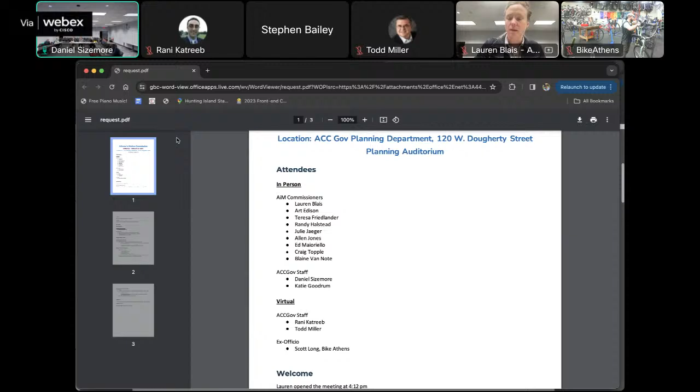We welcomed Katie as our new Vision Zero coordinator, talked about the Mayports 50 survey, heard a presentation from Randy about sidewalk gaps, budget. We'll also talk about the budget this time. Heard the local roadway safety plan presentation. Any additions, edits, corrections to our minutes?

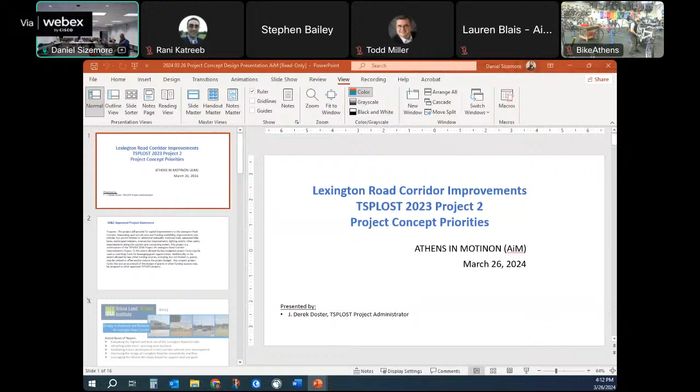Again, this is our T-SPLOST 2023 project number 2, and these are our project concept priorities, working with our user group, just like y'all are an AIM commission put forth together by mayor and commission. From a staff standpoint, we recognize and utilize user groups. A lot of times we'll have members from other groups, but we'll also have staff involved as well. We've been working with our user group back from 2018 all the way through this program that the manager's office has assembled. There's been a lot of history on it and a lot of projects. So let Daniel get settled.

So it's not presenting properly, so you don't have any animations, right? No. Cool, not that fancy. We'll just have this screen up instead of the full-on presentation.

Okay, so again, just the project, there's a sister project, or I call it a sister project. It is project number 2. Number 3, I will talk very slightly about that because it does tie in. But this is, again, the T-SPLOST 2023 project.

And this is the initial project statement of every project that comes through this program. The mayor and commission approve a project statement. Typically it's very broad. It may expand or contract some of the information that was submitted as a project, depending on what the needs are, what staff feels like it may need.

A lot of words, and this is on the Splost website, and it's basically similar to what Lauren said. It's not just for bike ped. It can be used for trails, landscapes, intersection improvements, just a whole collaborative thing through that corridor.

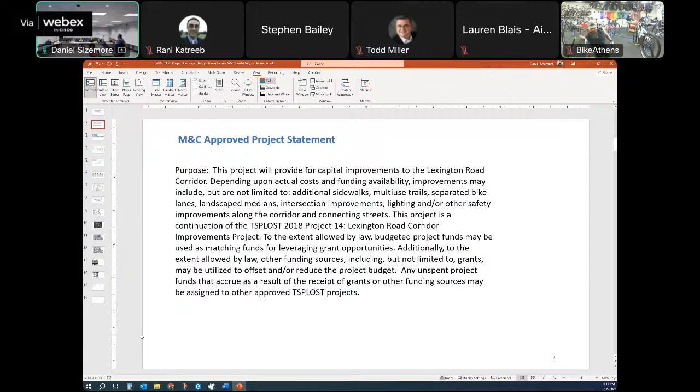I placed a couple slides in here that goes back to some of the information, even before the Splost 2018 program. The Urban Land Institute from Atlanta came in and did a very large work session presentation and public engagement opportunities for the Lexington Road corridor and Atlanta Highway. I just threw this up here as far as what is pertinent to today, but you can see the report for that goal, or the goals for that report.

It's more than just infrastructure. It's how do we improve a lot of stuff. But at the end of the day, that second to the last bullet point really, to me, is kind of how it ties into everything: how do we make the Lexington Road flow for everybody?

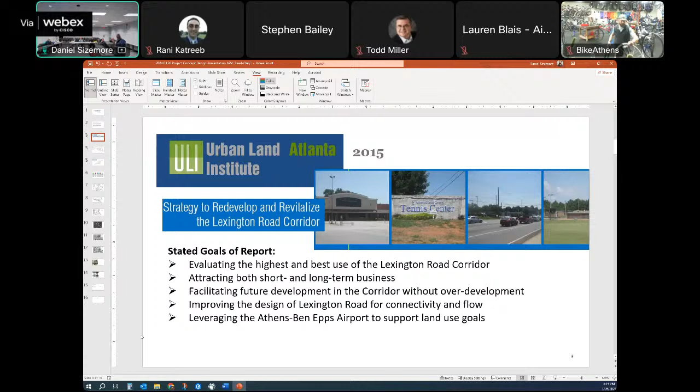And over time, it takes money. And again, some of these projects will help just kind of start nipping off some of it.

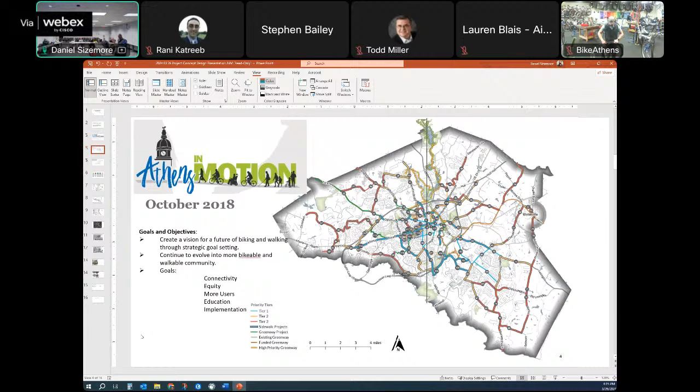So earlier was 2015, that was 2018. And then in August of 2019, Mayor and Commission appropriated funds for the Connect Athens Corridor plan. That was really concentrated on Lexington Road and Atlanta Highway, kind of like the Urban Land Institute - it drilled down to a little bit more of how do we do this. So there's a lot of research that's been going on over the years. Sometimes we research things to death, but there's a lot of history there. Just wanted to let you know that the user group has utilized a lot of that information to help get to where we are today.

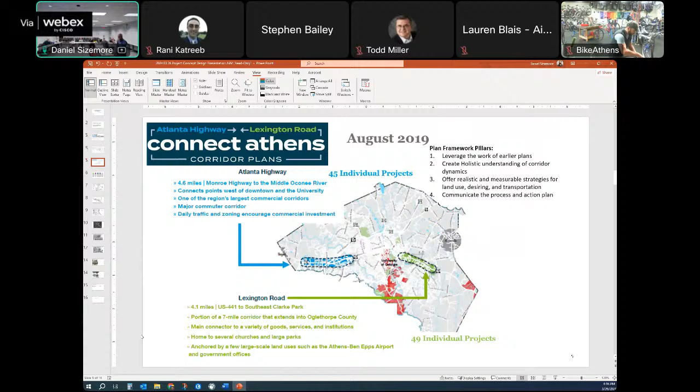I pulled these out of y'all's report, because I think everybody has different opinions of how things link up and move, but I think it's key that a lot of this matches up. The projects that we're going to show you, the user group feels really matches up with some of y'all's requests or some of y'all's initiatives.

We're going to connect things. They're going to provide a lot of equity. It should increase the users. We can use it as educational tools. And now we have some funding to implement something.

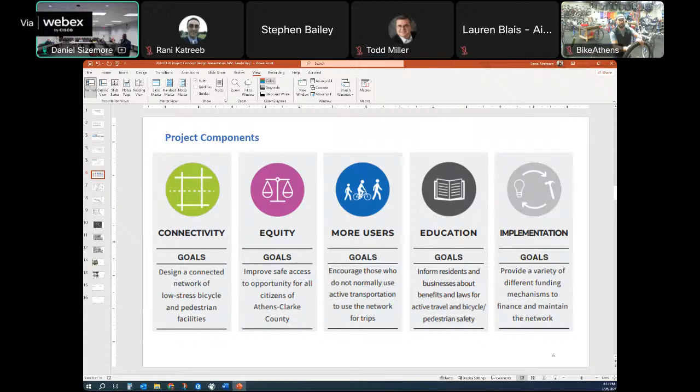And this project is underway. You ride by there, you know it's underway. And one of the reasons I wanted to show it to you is part of it's why some of the decisions we made were made by the user group due to connectivity, but also this informs some of the decisions that were made - not by our doings, but by the state's doing, not in a bad way. It's just, this project's been on the books for 30 years.

Some of this work will not connect both sides of the highway. And so what we're trying to figure out, part of some of our recommendations, is how to best connect some things. And what I really want to point out to you is bike and ped improvements. DOT has provided sidewalks on both sides. But as you pass under the bypass, the only bicycle facility will be from the park and ride lot at the red light, in front of the park and ride lot. I'm gonna get out of the way, I can't reach over this chair.

From the park and ride lot, the bypass goes over to Barnett Shoals Road, and then down. That small section on the south side is the only place that is a designated bicycle path. It's 10 foot wide, a multi-use shared use path, from the park and ride lot to there. And then there's a 5 foot sidewalk on the other side. So I say, if you understand that, that's what the state's doing, and hopefully when we make some connections later, it makes more sense.

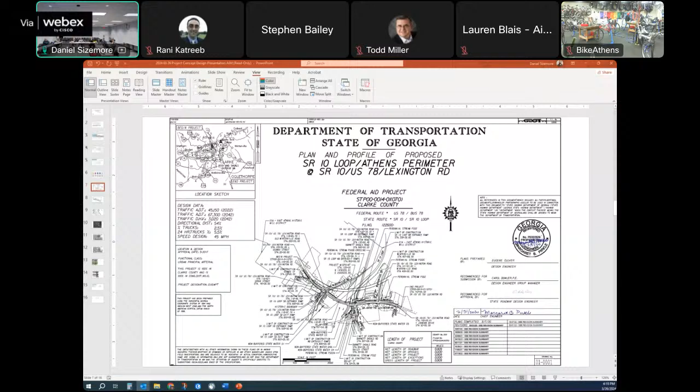All right, so we say all that, and I back up a little to the 2018 project we talked about earlier. There's a project on our books we're moving forward with, a sidewalk extension. We're picking up where it says begin project, under the funding of the 2018 program, coming down to almost Barnett Shoals Road. And we're building a 5 foot sidewalk on the south side.

Where there's places that have sidewalk, for example the new racetrack, they were required to put in sidewalk. We're not going to tear up something previously built that's in good shape. If it's there and in bad shape, we'll take it out and replace it.

Just for clarity, you mean down to Cherokee Gaines School? Yep, Cherokee Gaines School. So we're going to provide that sidewalk connectivity. On the south side, you will have sidewalk connectivity from this intersection. It actually goes down further because there's a lot of sidewalk down this section, all the way back. So you can go from here all the way to town now.

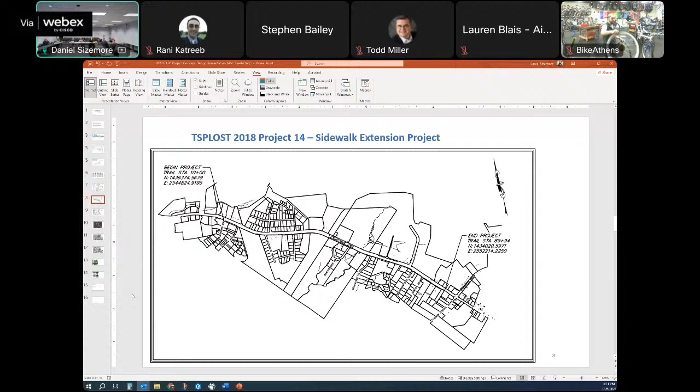And so that was that program. Now we're coming into the blow up of y'all's program, project number 63 there. The DOT project is just east of your project 64. Again, there's no connectivity to Firefly or that bike lane between the Gaines School Road or Barnett Shoals Road intersection and Johnson Drive. So there's where Johnson Drive is moving forward. It's really hard to say there's any bicycle facilities, it would just be sidewalks.

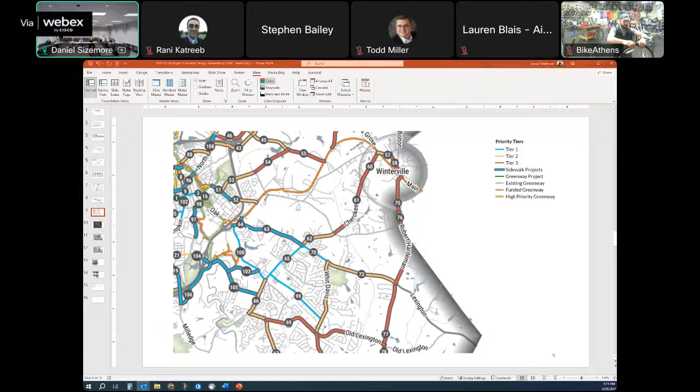Okay, next slide, it's just the aerial of the project area, I just wanted to point out. So you've got the airport, Home Depot, the new Whataburger coming in, Walgreens is shut down, I'm not sure what may go into that facility. And as you move past this dirt area, that's the new apartment complex that's there, with a red light at Atlas Way, that roadway intersection.

So there's a couple things as far as our corridors. It provides a stop for traffic when somebody needs to make a left-hand turn, and it provides a safe crossing on both sides. So that's a key component. And remember, everything done on Lexington Road is DOT, so we aren't the gatekeeper there.

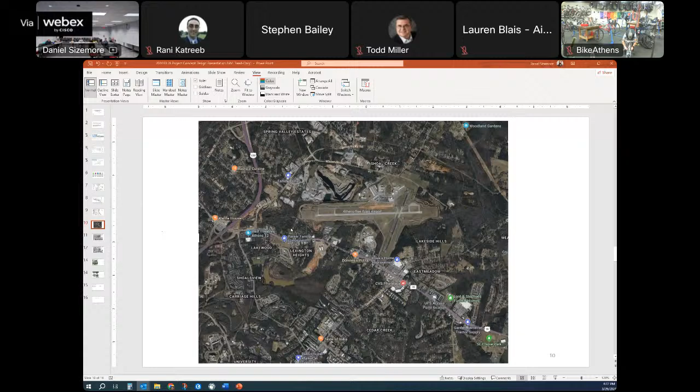So this brings us to our overview slide of some of the projects we pulled from those past reports, some of the past work that was done. We did extensive public engagement in the 2018 program, and we pulled a lot of that information back to the forefront and combed through it, coming to these projects that the user group felt was important from a master planning standpoint.

The yellow dotted line is a proposed shared use path. You go southeast through Clarke Park up to the Firefly Trail. The dark pink or hot pink line down at the bottom is the funded sidewalk project from 2018, so that will get done.

Depending on where we are, we may want to increase pedestrian crossing activities and provide safe crossing opportunities. These could be red lights if a traffic signal is warranted, or a pedestrian hybrid beacon—basically a stop light for bike and pedestrian traffic to get across and stop traffic. Those are a couple of places we've looked at.

Again, at Atlas Way the traffic signal is already there, and that's the little orange area right there. Plenty of bus stops.

We're working with transit on both projects, making sure that anytime we pass a transit bus stop with a sidewalk, it's connected. A lot of times right now there's just a sidewalk, or a bus stop with no sidewalk to it, or a gap between the sidewalk and, say, a ditch, with no way to make that connectivity. We're going to make the connection so whether you're dependent on the transit system or you prefer it, we want to get you to those stops without getting your feet in the mud.

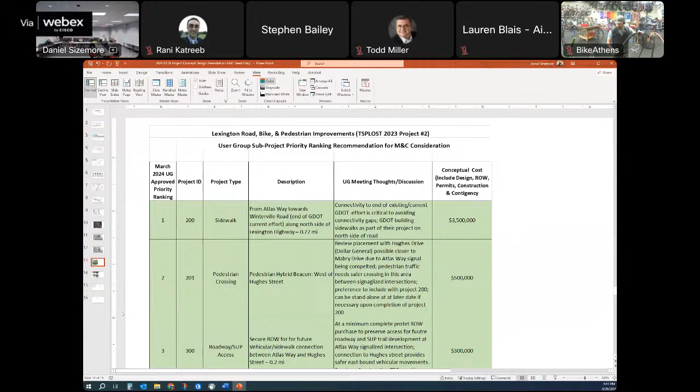Daniel, can you scroll a bit? In totality, after Mayor and Commission concept, in the August, September timeframe, we probably have a year's worth of work for design, getting the proper survey, all that kind of good stuff, and to actually design it. Then becomes the issue of land, or we still have to bring that back to Mayor and Commission to get the preliminary plan approved. So you're probably 12 to 15 months from August to come back to Mayor and Commission.

After Mayor and Commission approve the preliminary plans, the largest amount of time then becomes right-of-way acquisition or easements, buying that punch-through section, depending on what that takes. That sets the train in motion to connect the trail. Those are private property acquisitions, so there's only a couple private ones between where Atlas Way connects and the Firefly Trail. You've got the large quarry, we own the quarry now, we own the airport, and there's a lot of county property in between there that we don't have to go buy.

That will probably move more quickly than the sidewalk section, just because of the number of parcels on the sidewalk—like 15 homes that are there, plus several businesses across there. That land takes longer than most people anticipate. By the time we get the surveys done, Mayor and Commission approve, create the easement plats or right-of-way plats, do the title reports, appraisals, all that good stuff, and then give those property owners an appreciable amount of time to review it and accept it or negotiate.

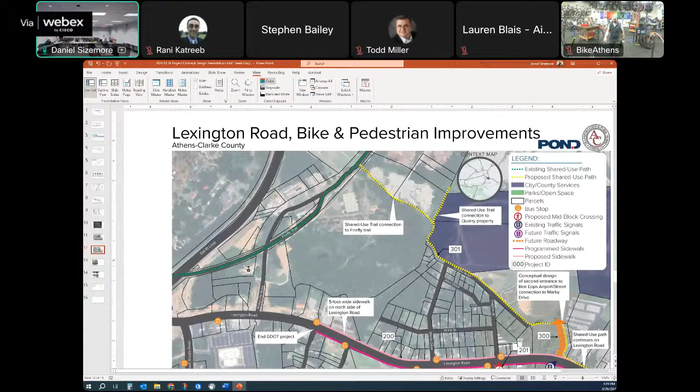You're just a little bit short on estimated funds for that first phase. No, I think if you look at any one of these projects independently, we have the money. And what I was saying is if you add all those up, it's just right now a little bit larger than the budget. That's what I mean, so you're a little bit short from being able to do all those things. But you indicated a couple of them, in the 250 range, one might supplant the other, so you might be able to give it back and forth.

Yeah, and even like, for example, 201 here is one of those $500,000 hybrid opportunities. You know, that was born a little bit before that was an actual reality. The signal is what I'm pointing to. Right, so GDOT may come back and say we're not going to support that right now until you prove there's additional traffic, pedestrian traffic that we need to put one up. So that $500,000 might come back into the pot.

And to be clear, those are pedestrian hybrid beacon locations, sometimes called Hawks. A lot of people think we're trying to say we should put in RRFBs, what people are used to seeing around town. I think the closest thing we have in Athens to a pedestrian hybrid beacon is the intersection of College and Broad, where College Avenue was closed down and is now College Plaza. The only time that signal is actuated for cars to stop is when pedestrians call for a walk signal.

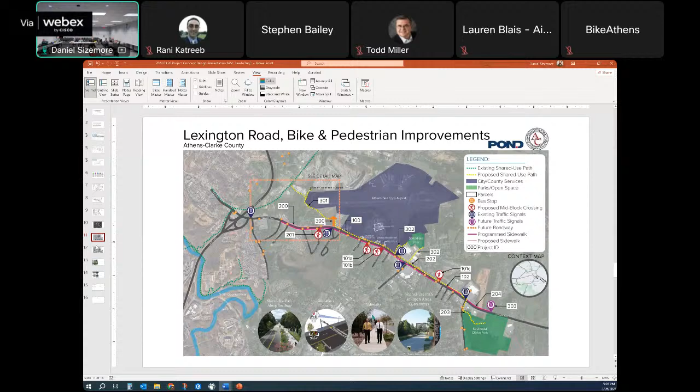I just want to point out, with Winterville Road coming up through here, there's a large creek that comes down through here, so there's a lot of environmental concerns here.

And that's why, it comes down and comes all the way around it. If you ride by the construction site, you'll notice GDOT's putting up those MSE big retaining walls. So they're not putting in a lot of dirt and filling in, so it's not going to be very easy to come back later and say we want to just kick a sidewalk out.

Or widen one up. That was one of the reasons why, when we did have a meeting, I remember sitting in the meeting with DOT when Drew Rassler was our local transportation director, we went to several of those meetings and expressed our desire for some of those.

Unfortunately, it was one of those where, because we're trying to thread the needle under the bypass, not trying to add another billion dollars to the project, a lot of that environmental concern was just, going back to funding, the majority of that intersection improvement funding, if I remember correctly, comes from a special pot of money from the federal government for trucks.

For truck movement. So if you know what they're doing, I can show a different picture on a later day if you want, but how actual traffic will move through that intersection when it's completed, it's really going to open up an opportunity for vehicles to move without having a lot of trucks blocking those intersections.

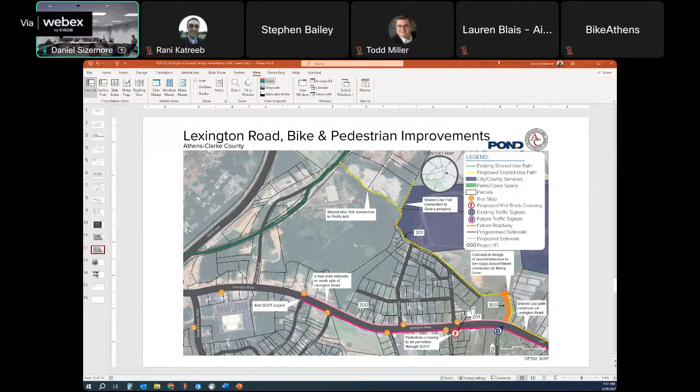Daniel, you said you had priced out some items. Yeah, I'm trying to figure out how to stop sharing—they changed the interface again. All right, so back to the, okay.

We also purchased more vests. Those, I believe, are being delivered directly to Teresa. I haven't gotten an update from her on whether they've arrived, but I think it's a few weeks lead time on that. We did receive some quotes for what billboard messaging would cost.

Do you want me to cover that? You want to talk about your conversation? Sure. Actually, she just sent me an information sheet that I forwarded. Basically, they suggested packages with increasing number of locations and time.

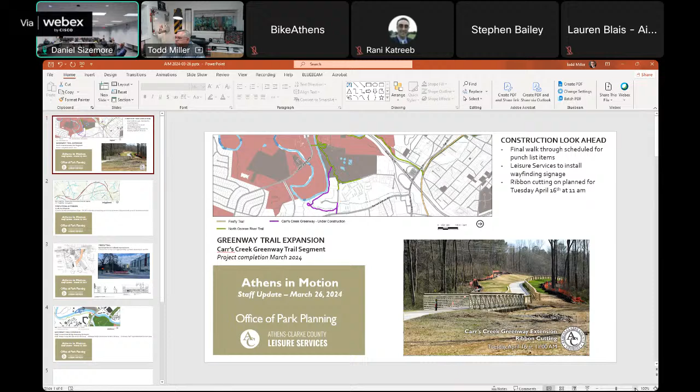There's been kind of an issue with the meetings. Todd didn't get the invite for the February meeting, which is why we didn't get an update from back then, sorry Todd. And he didn't get one today either, so I'm gonna have to figure out what's going on with that. If anybody has been having issues getting those invites, please let me know, because I send it to the Athens in Motion Commission listserv. Todd should be on that, he gets the other things. I apologize for not double checking on that, Todd. I'll put a tickler in my personal email if I don't see a notice. Just come, Todd, just show up. I have a placeholder event, and I'll invite you to that one. Okay, that'll work.

Okay, just a quick update. The Carr's Creek Greenway, the section that some of y'all have already took a little ride on, that one is pretty well done. We're having our final walkthrough scheduled, to look at the punch list items to make sure they were complete. Leisure Services needs to install some wayfinding signage that probably will go in next week. And then ribbon cutting is planned for Tuesday, April 16th at 11 a.m., and I believe that invitation has gone out.

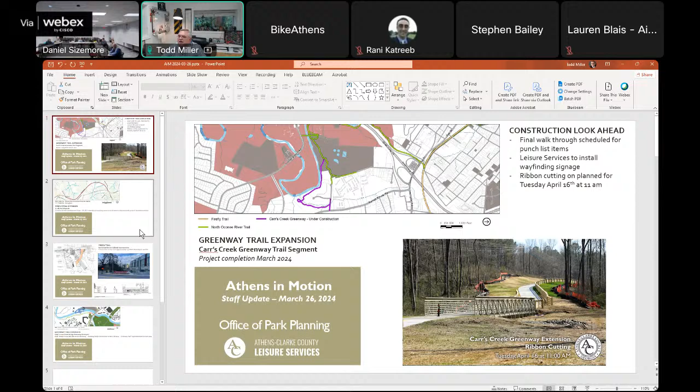So, and then Firefly Phase 3 expansion. SPLOST office is still working on acquiring construction easements. I believe there's approximately 9 parcel easements remaining that are along the corridor.

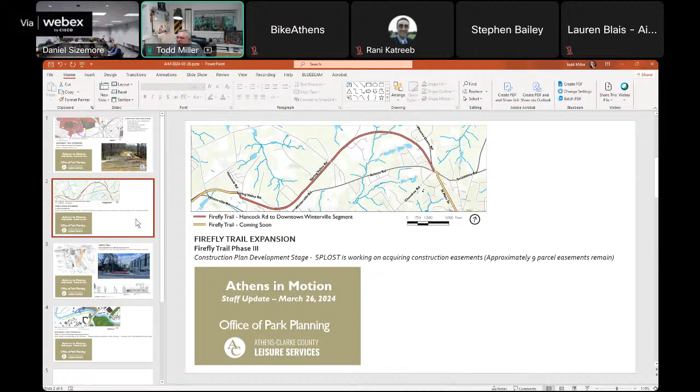And then just the Oconee Street Bridge Greenway Underpass, still pretty much the same. The GDOT Bridge project, I believe GDOT is letting it for bid in April, and then that roadway construction should start in the fall. I believe Derek's plan is to let the Greenway Trail portion, the little red line, go out to bid in the summer of this year, so it'll piggyback right behind the construction of that bridge. So that's pretty much it.

We can talk about this more offline, but from this location - from the end of the trail where it comes into the existing paths in the park and connects to the trail, I know that there used to be some cobblestones along that. Has that been replaced to be a little more usable? It has, those have been replaced.

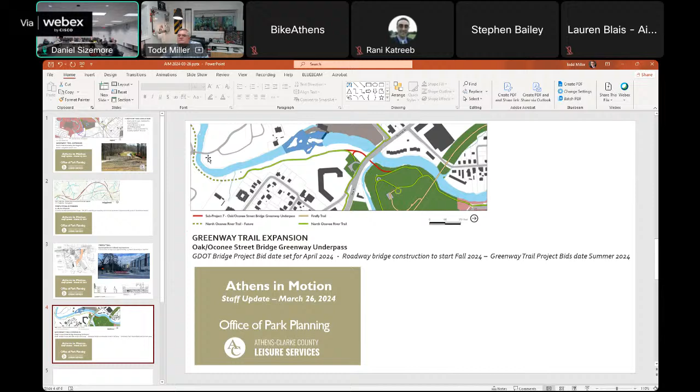Yeah, so Derek, just 9 parcels to go. Yes ma'am. Construction maybe begin in the summer, something like that? More likely in the fall. That takes us all the way to Winterville at that point? Yes sir. Great, y'all just hold on loosely, it's gonna be done.

Is there any planned date for when they're gonna repair the section of the Greenway by the Waffle House off Lexington? No, and I've actually reached out to DOT - unfortunately some of the asphalt work that the contractors told DOT they'll fix as quickly as they can, but there was no timetable. Within 20 years? Well, but the project will be done in like June 2025. Yeah, I believe the Southern expression is real soon now. Bless your heart.

Well, thank you, Todd. No problem.

Right, on to some general staff updates. Riverbend Road - Daniel, you had mentioned there might be an update, so Ronnie, you had some notes on that?